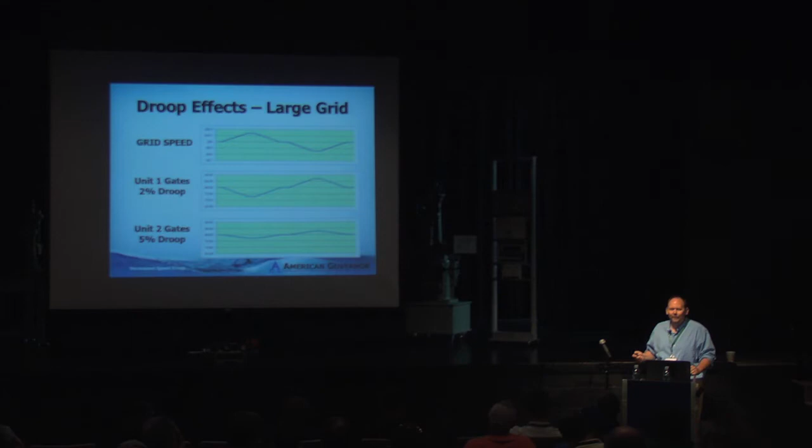Now, the need for droop serves a number of purposes. It's actually a form of compensation, so it adds stability to the turbine control system. Changes in gate position are used as feedback to provide stability. As the gates move, we adjust our speed reference, and it helps have a calming effect on the governor, allowing it to stop at the desired gate position. It also helps compensate for water starting time and machine starting time, as will be discussed later in the stability discussion. It also allows multiple units to share load together.

If we didn't have that automatic feedback mechanism, for all the units you have online, if you changed your speed reference, it would want the turbine speed to increase to that number. So if you were sitting at 100% speed and gave it a speed raise, the gates would start opening, because you're waiting for the speed to actually change. But on a large grid, you only get small changes, not large ones, and you'll never satisfy your governor, so you'd go wide open. Conversely, if you backed off the speed adjust, you'd drift all the way closed until the unit was unloaded. So it's a feedback mechanism that says it's okay to stop at a gate position when you're not at 100% speed.

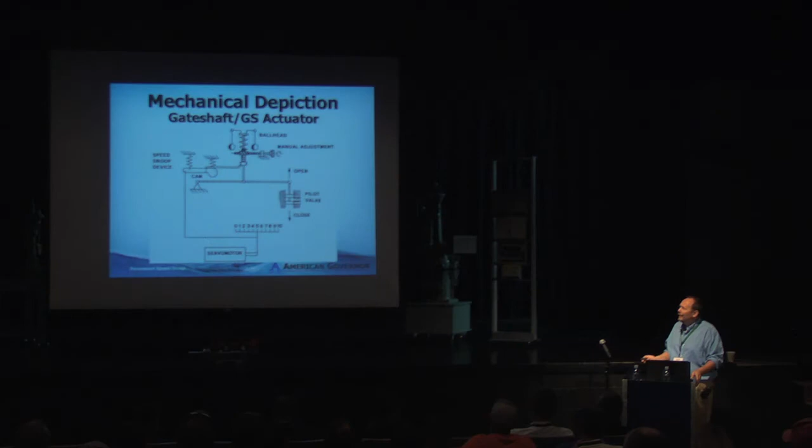So this whole assembly slides up and down, and this is your speeder spring. As the gates move, you get this assembly rotating, which causes this lever to pivot up and down, which then slides the speed adjust up and down. It's a very simple mechanical feedback, and that accomplishes the droop function.

So you've got your adjustment here, your droop adjustment here, and your speed adjustment up here. The speed adjustment, you adjust by turning the knob. It turns the worm gear drive, which drives this cup up and down relative to the sleeve. So you can create more tension by cranking the cup up. You're compressing the spring, and then this assembly has to slide back down to relieve that tension. Is that pretty clear to everyone, how that works? Okay.

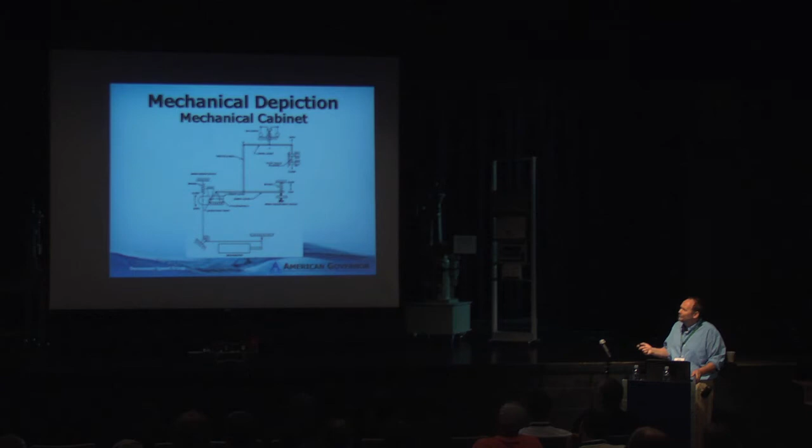Right, now here's the more complex version of that. This is kind of the whole ball of wax all put together. Hopefully by day 3, for a lot of you, this diagram will be old hat and it won't be intimidating at all.

There's a lot of stuff going on here, but this is the actual full schematic for the mechanical cabinet actuator. But really when you break it down into its sections, everything's just the same as what I showed you.

We got the ball head coming in, our pilot valves over here, here's our floating levers, and here's our speed adjustment. It's just a slightly different configuration.

As you change your speed adjust, you're just moving the end of a lever up and down, and in order to get everything back to the centered position, your droop has to come in and lower or raise the other end of the lever. It's very straightforward, and it's connected to the gate position.

So once again, you have an adjustment of where the fulcrum ball comes in, and based on how you turn the droop dial, that just changes the pivot point.

So even though the diagram itself looks a little complicated and overwhelming, when you start looking at the individual pieces, like the gate limits and the dash pot for temporary droop and the ball head assembly, it's all very straightforward.

And I think Jerry's kind of impressing that upon you, that the governors are actually pretty simple when you have your basic feedback mechanisms in place.

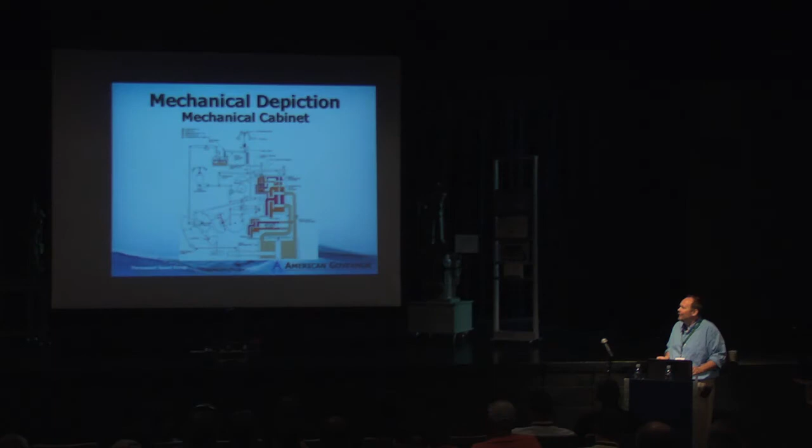Now, we talked about the mechanical governors, and I just want to say that in digital governors, basically we do the same thing, it's just we do it through calculations.

We go ahead and set up an equation where we solve and balance the equation and wind up with a resulting error.

The basic equation is the speed, which would be your system speed or your turbine speed, has to be equal to the speed reference minus actuator.

We say actuator instead of gates because sometimes it's needle, sometimes it's deflector, times the droop value. So basically, it's a very dynamic equation, and solving for error, we wind up with speed reference minus actuator times droop minus the speed.

So feeding our PID, which is a method of controlling the gates with a stability routine, basically you generate your error. You can either change the speed reference, you can change your droop, you can change the actuator position, or you can change the actual speed.

So imagine when you're offline, this equation's being continually solved. You got your speed, which actually is changing because you're trying to synchronize.

You got your speed reference, which is changing because you have operator input trying to get the turbine to speed up and slow down from either the operator or the automatic synchronizer, and you have the actuator, which is the gates, actually moving the whole time.

All right, so when you're going to synchronize, this equation is very dynamic, and it actually bounces around quite a bit. If we look at the PID that this feeds, you can actually see the error moving up and down.

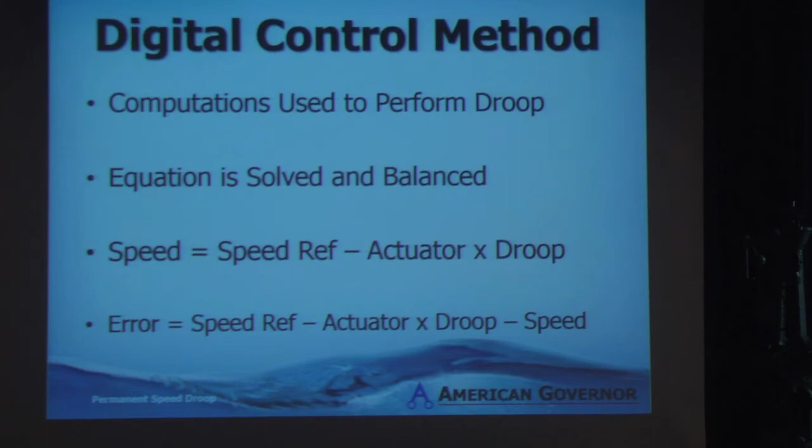All we're trying to do is just balance these three components out all the time. It's just sitting there balancing it out. And mechanical governors do it mechanically, and digital governors literally have this equation built into it. We solve for it and then send it to the stability routine.

So here's a real world example of what's going to happen. We have a generator that's capable of operating one saw. So what's going to happen when the first log is sent through there?

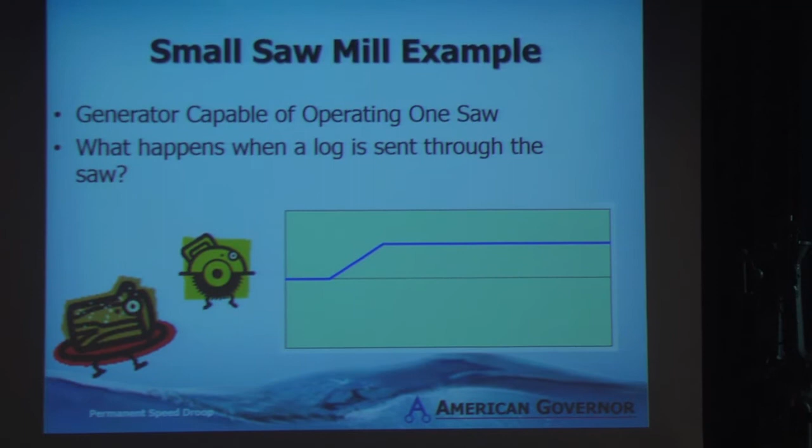What we have here is the load is increasing on that diagram. So basically, we all know from common sense that you go ahead and load up the motor. The actual load of the unit is going to increase.

The speed's going to take a dip. And then with temporary droop, we're going to wind up coming back. The gates are going to swing around in response to the load, but then we're going to settle out.

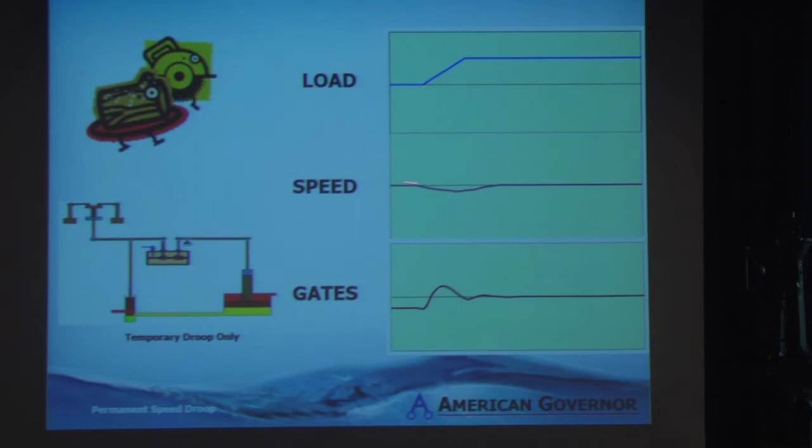Notice the gates are at a new position because we have to put more power in while we're cutting the wood. So initially we have a speed disturbance. The governor reacts. Now this is temporary droop only, we do not have permanent droop in here. All we have is a dash pot for stability. So we wind up with the gates in a new position to get our speed back to our nominal speed.

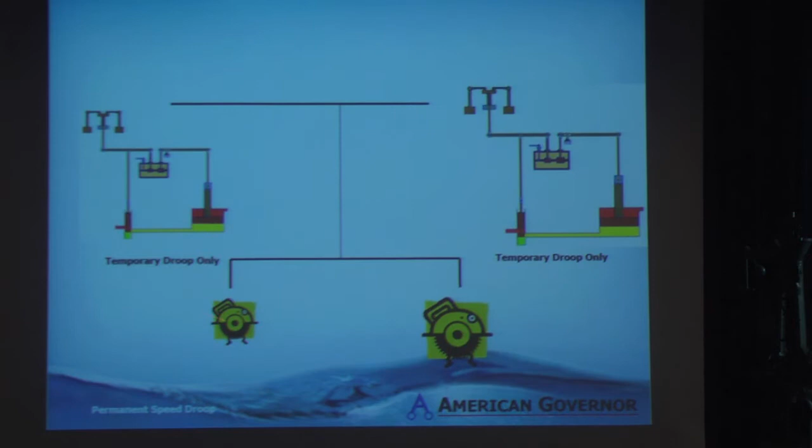But now the demand for wood is increasing, and we have to add more saws to our system. That presents a bit of a problem because we want them all to work together. If we have two units with temporary droop only, they can start fighting each other. So we've got two saws working off the same grid, one depicted larger than the other.

So we go ahead and start feeding wood in, and as we create a system disturbance with zero droop, we can create an instability, because both units at zero droop want to do everything they can to get that speed back to the original set point. They've been told: go to 100% speed, keep it at 100% speed, no exceptions. So they're going to do everything they can with their actuators, their gates, to get that speed back, but they don't know the other guy's there. So they start reacting to each other, reacting to changes, and you can wind up with a scenario where the whole system goes unstable, because the units react as quickly as possible to the load, with some temporary droop for stability, but it can lead to instability, as shown.

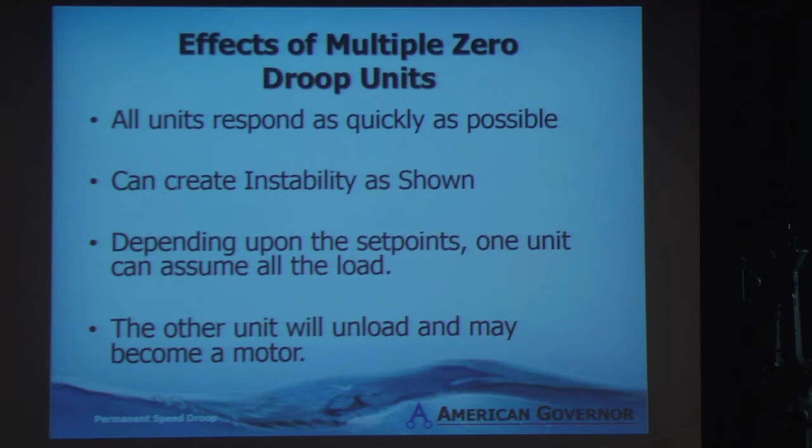Or, depending on the set points, because no measurement system's perfect, one might see the frequency as a little higher than the other, so he'll be trying to shed his load, and the other one sees it as too low, so he'll be trying to pick up. So you can actually have them going to extremes, where one unit loads all the way up and the other sheds all his load, but then once he sheds far enough, he can't carry the whole load anymore, so you wind up with this weird interaction where one guy goes all the way open, and then the other comes back up to some level. But you don't have any control of the system there. You're lucky if it goes to a stable state.

I've showed up at sites where the droop cam was mysteriously set to zero, and the unit would be fine when offline. As soon as they closed that breaker, the unit would go all the way to 100%. Then the operator would try to get it back down, crank the speed adjust down, and the unit would unload, go in the hole, and trip off. So all it was, was just a droop cam setting, because without that feedback mechanism, you can't get rid of the error in the speed reference without the actual speed changing. And if you're online, your speed's not going to change enough to pull that back out.

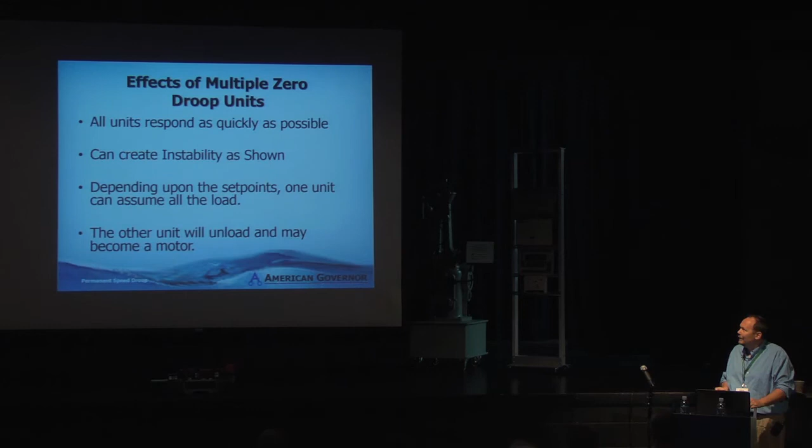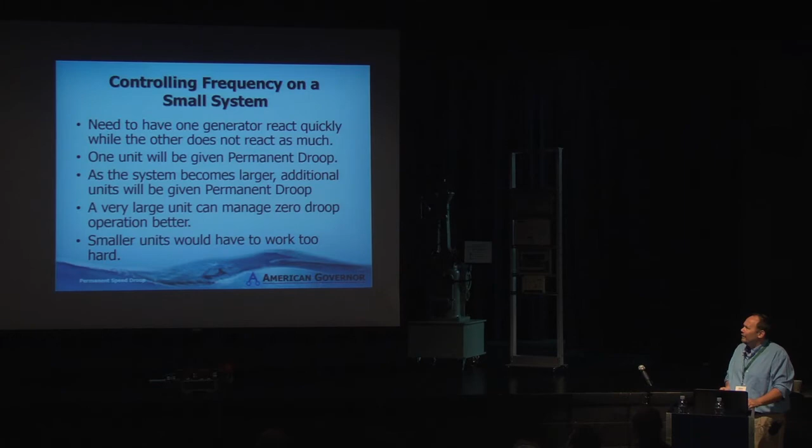So you don't want to run multiple units together without droop. What we want is, you can have one unit on zero droop, but the other needs to have some sort of droop on it. So we're going to put permanent speed droop on the system, and as the system becomes larger, each unit we add will also have speed droop with it. You can have one unit, preferably a larger unit, manage the zero droop, and have the smaller units have, say, a 5% speed droop on them.

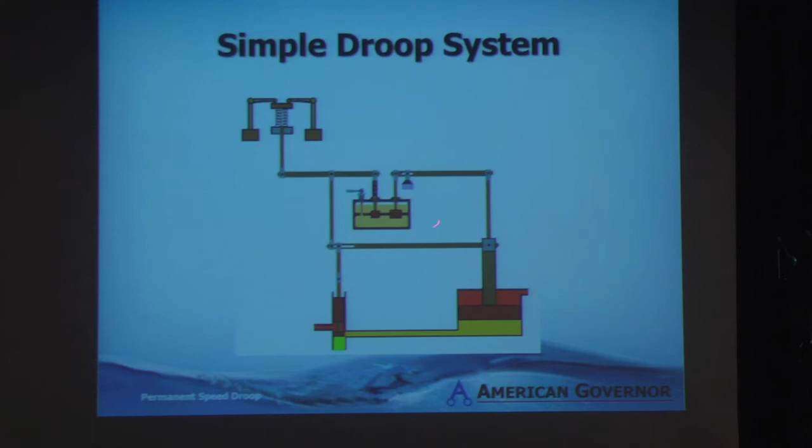So this is a very simple droop system where all we've done is added basically - there's no real adjustment here, I'm not even sure that adjustment would affect other things, so that's not really a droop adjustment, but it's just some sort of fixed feedback coming in. So as our actuator moves, we can see how we're acting on the pilot valve to cancel out what this side is doing. And of course we have our dash pot, talked about before, as our temporary compensation for more stability. So now we have a simple droop system.

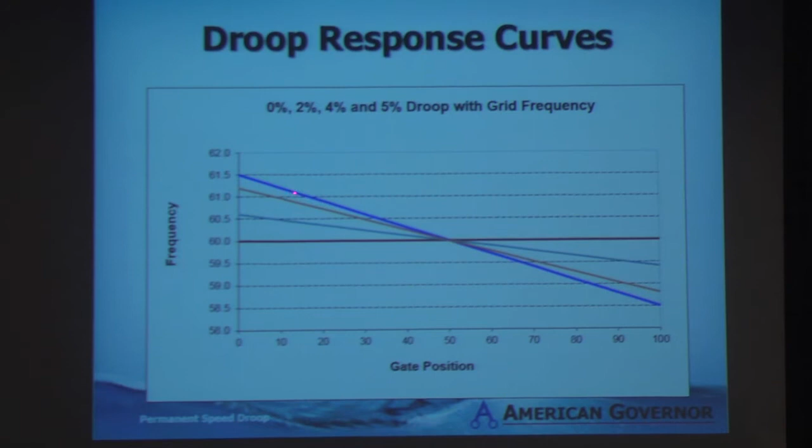What we're going to see is these response curves. I hope this makes sense. The different colors represent the droop value - the steeper the curve, the higher the droop value. So the unit will follow this curve, or these lines, according to their droop set points. This is a 5%, a 4%, a 2%, and the horizontal line is the 0% curve. Now let me interpret this just for a minute.

If you're sitting at exactly 60 hertz and 50% gate, and you're running 5% droop, if the frequency changes on you from the outside world, you're going to follow this line to wherever that frequency intersects the blue line, and that becomes your new gate position.

It's very easy to predict this because it's linear feedback, so you know exactly where you're going to go. If the frequency increases to 61, your gates, because it sees the grid going too fast, will back off until you wind up at approximately 20%. So it's a fixed response you're going to see. You've basically defined an allowable speed error that's acceptable to the governor so it doesn't freak out and go all the way to its extremes. You've created a stable definition for how to behave under certain situations.

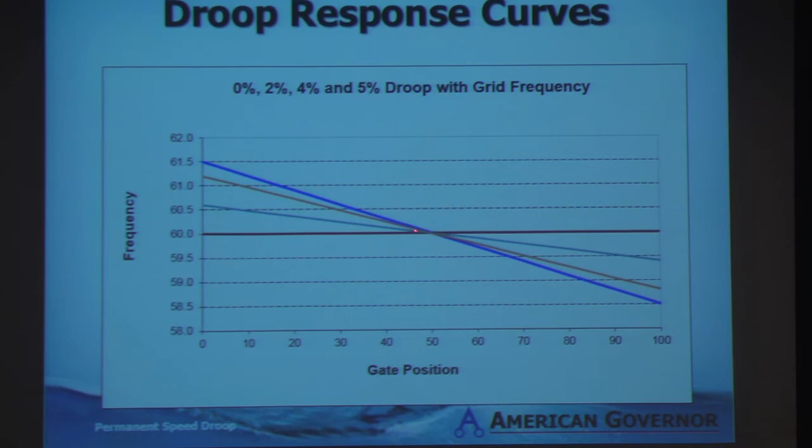If you set it and walk away and the grid frequency changes, you can come back and say, oh darn it, I'm not at 50% anymore, I'm only at 49. But you don't know if something's going on with the governor, if somebody made a change, or most likely it's a change in frequency. So to evaluate what the governor's doing, you have to know what the frequency is to evaluate its performance.

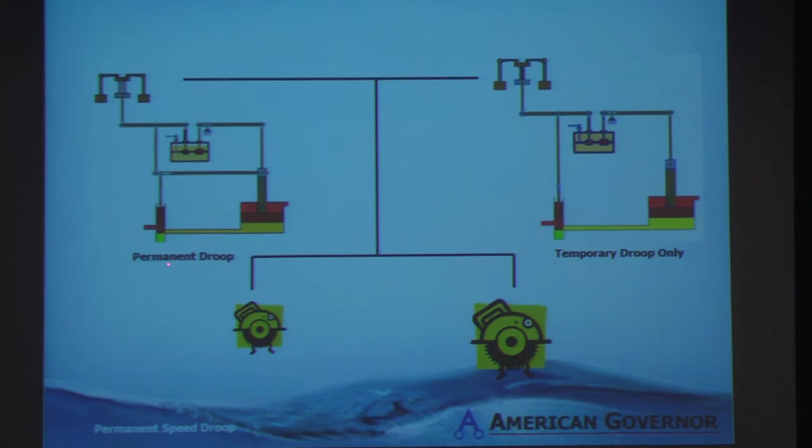So here we are back at the sawmill. Now we've got two units running. We've got temporary droop only, so that's going to be zero droop, and then we've got permanent speed droop on this saw. So we have our speed droop governor here and our temporary droop on the right, both connected to the same grid. As the load goes up, since we're cutting wood and take on a load, our speed drops down.

The first unit at 0% droop, his job is to do everything he can to get that speed back up to 100%. So you're going to see a reaction like this, where he takes on the load. This is the gate swinging around, this is the gate position. You're going to see it swing and show a quarter wave decay for a properly tuned governor. But he settles in at a higher gate set point when the speed finally settles in, so he's satisfied.

The zero droop governor is only satisfied when the speed has returned to its initial 100%, right? Whereas unit number 2, running 5% droop, initially picks up the load because we have a speed error. Remember, the 5% governor is following that curve, following that blue line. So the blue line told this guy to go to this gate position with this error, but as the error goes away, he's following that line back to right where he was.

So unit number 1 at 0% has actually picked up the majority of the load, or all the load change, I should say, and the 5% guy is happy as a clam because the speed's going back to 100%. So because of his droop equation, he's satisfied here, whereas the 0% guy is at a new position. Even though the speed's right back where it was, he stabilized at a new position. So the 0% unit wants to do everything it can to get back to 100% speed, while the 5% droop unit doesn't care so much about speed except for the fact that he's following that blue line.

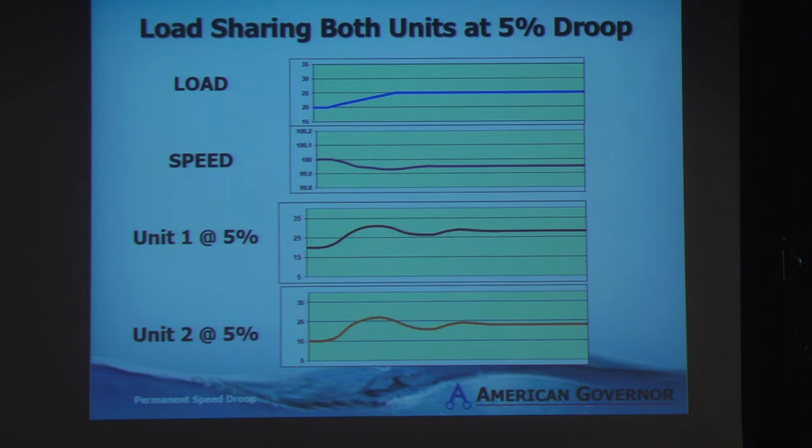Now the operator could, if he thinks his load's going to be constant, walk up to each governor, crank up the speed adjust, and crank it up until the gates go open enough to get you back to 100% speed. So without some operator involvement to act as kind of an integrator, you're never going to get back to your 100% value, right? Because they're both running 5% droop.

So in order to load the unit, we're going to have to make it think it's going too fast or too slow. We've kind of covered this in the background already. So what we do is we bias the speed reference. When you're online, you move the speed reference up or down, and it'll create that error, and it'll move the actuator until the droop function pulls it back out.

Is that pretty clear how that works? So your speed's not going to change, and your actuator's not going to change on its own. The only choice you have as an operator to load or unload that unit is to change that speed reference value, and then it'll follow the predefined droop curve and pull out the error that you induced. The droop will pull that error back out until everything's satisfied.

So once again, on this chart, we can see that we have our speed adjustment. We change it, and if the speed doesn't change, then our pilot valve will move because of our speed reference change. And then through the hydraulics, we move the gates, and only the droop can get you back.

Now, if you're just sitting still and you wind up with a speed change, you're going to get the same effect without changing the speed reference. So if you actually get a change of frequency on the grid, you're going to wind up moving the gates, and then the droop is going to come in and offset this pivot point, which will then, instead of recentering this lever, you're going to be recentering this lever.

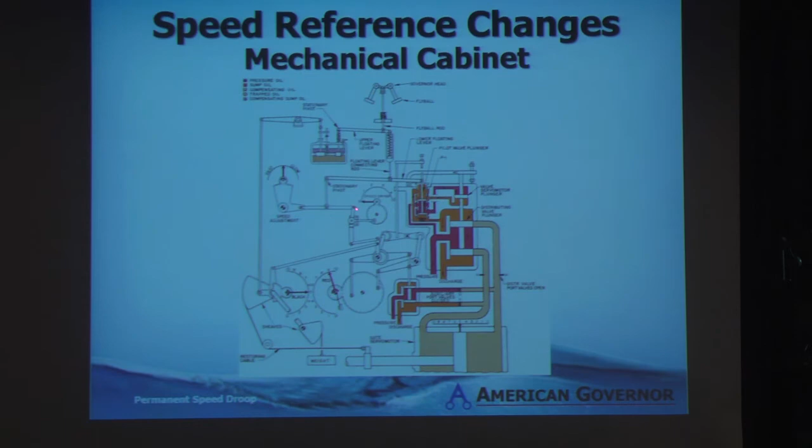Because you've changed, this ball head is not in the same position. So no matter what changes, whether it's your speed adjustment or your actual speed, the droop's going to come back in and nullify that error and make the gate stop moving.

So basically, droop is not a mystery. When you set your 5%, your 4%, you can calculate exactly what your expected gate change is going to be based on an actual change in speed or a change in speed reference.

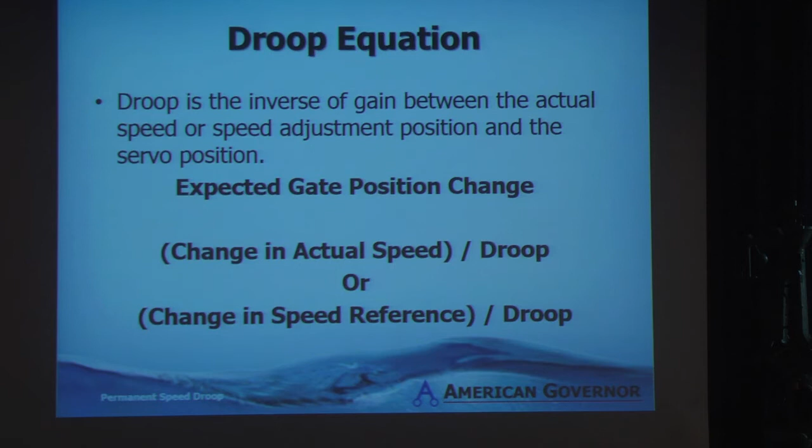So you know if you're running 5% droop and you do a 1% speed reference change, you're going to move your gates 20%. It's just straightforward linear mathematics. So given that, if we were to see a 1% change in the actual speed or speed reference at 5% droop, we get 1 divided by 5 is 20% servo change.

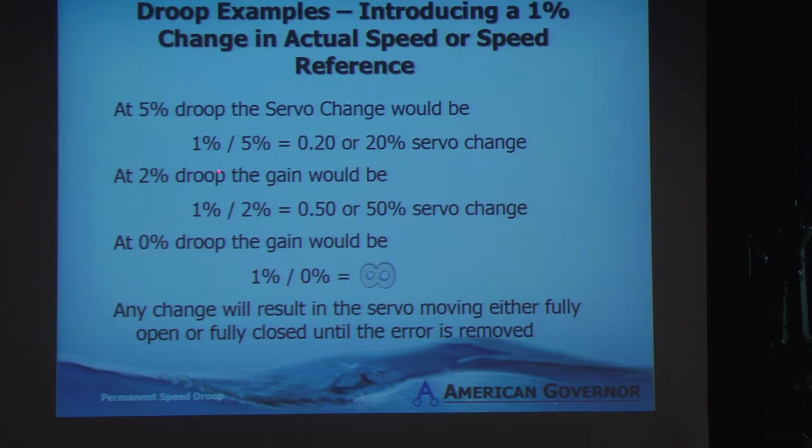At 2%, you just do the math, you get a 1% speed reference or speed change divided by 2, now you're at 50%. So there's a huge difference in operation between a 5% and a 2% unit. You're going to find the 2% unit cares much, much more about speed than the 5% unit. And of course, at 0%, you do the math, infinity.

It's going to do everything it can, everything within its power to get that speed error gone by moving the actuator, because there is no feedback. So what will happen is you either go fully open or fully closed if you can't actually change the speed, because say you're online.

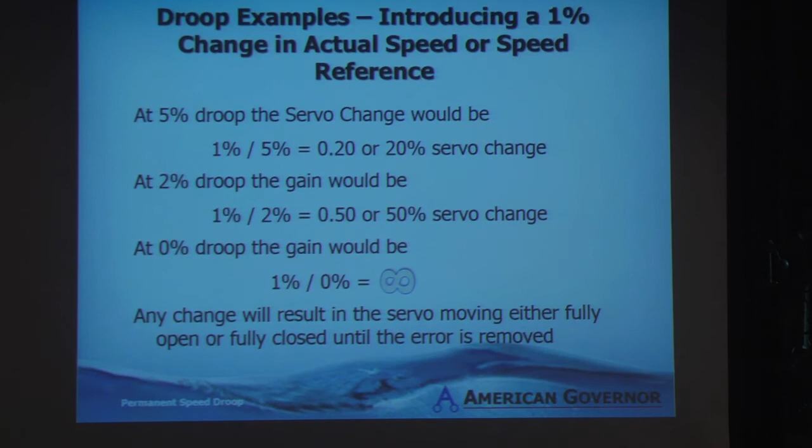So here's some normal daily grid variation example. As I said early on, in our neck of the woods, we can go 98 to 02 pretty easily. So we get a tiny little speed change on the grid. At 5% droop, you actually wind up with, just running through the math, a little over 0.5% gate, and that's over just a couple of minutes. You can watch the grid go up and down.

So you can sit there, and if you're oscillating, say between 98 and 02, you can see a 1.2% swing in your gates. I shouldn't really call it a swing, I should call it more of a drifting, because it does take time. But you will see motion. And of course, if you're running at 2%, it's even worse. So you can easily see fairly noticeable changes in your gate position just based on normal grid behavior.

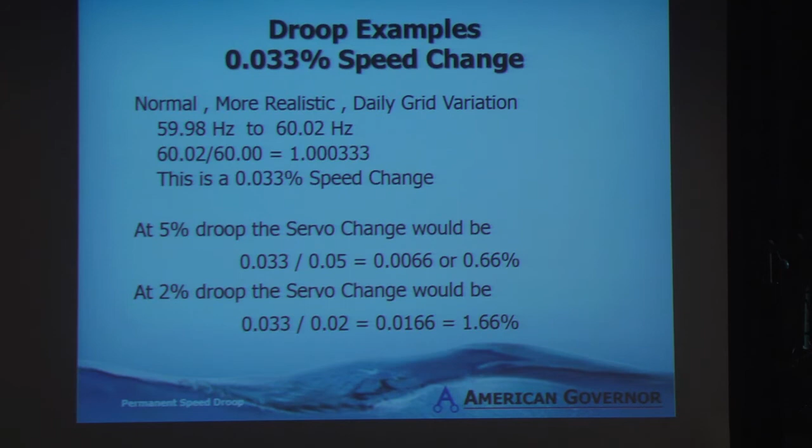This is a very common number to watch the grid change. So it's okay to have the unit swinging around. The governor's doing its job. It can't maintain the grid speed, but it can help out. So as your grid starts to slow down, all the governors all over the area try and take on a little bit of load. And if everybody is running droop and picks up a little bit of load, then the frequency stops dropping. Conversely, if things go too fast, and everybody sheds a little bit of load, then you'll head back towards your 60 hertz set point.

So that's just normal operation for a governor. That's why hydro is fairly important for stability, because a lot of people don't run that way. You'll have various nuclear plants that want to go on reactor control, or steam plants want to run off their boiler control. They don't want to be bothered with actually changing with speed and turbine. So there's all kinds of studies that talk about the importance of hydro and running droop.

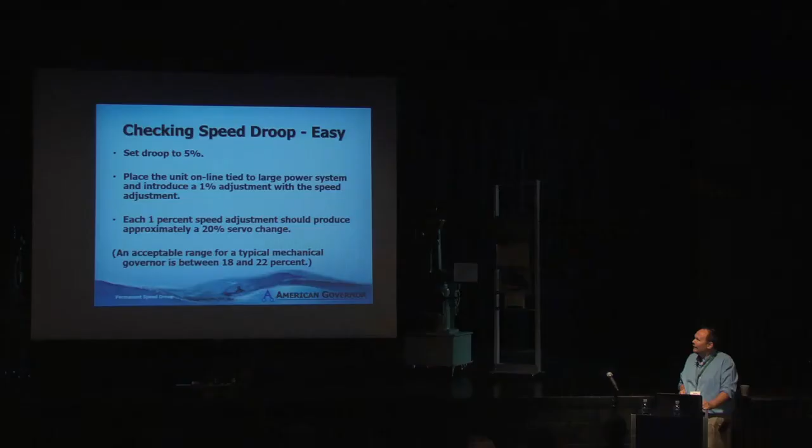So if you actually want to check your speed droop, it's pretty easy. We'll say you set your droop to 5%, put the unit online, and put a 1% speed adjustment in. So you should expect, as we had discussed previously, the ratio will give us a 20% servo change. 18 to 22 is pretty good for a mechanical governor, although I'm sure they can do better. Is that a good number, Jerry? 18 to 22, pretty good?

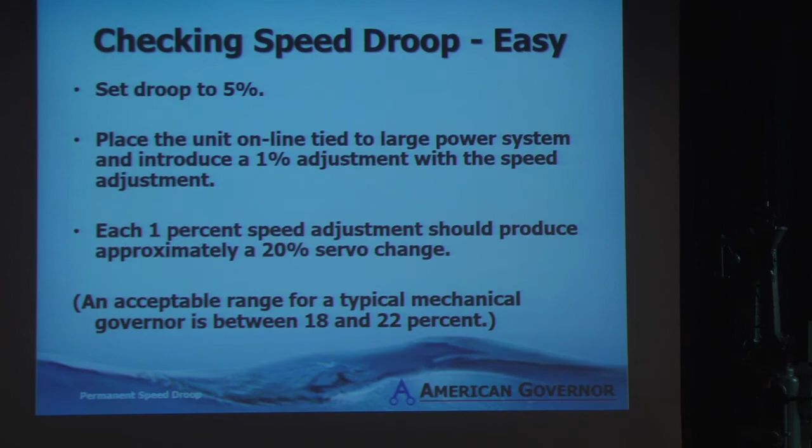So the more complex way is actually to put the system on and load it up, record the gate opening and the ball head speed, unload the unit with the gate limit, basically leave the speed adjustment alone. Then once you open your breaker and you're free to speed up the unit, raise the gate limit out of the way and record the ball head speed, and your droop calculation follows this equation.

So what you do is you go online, you go to a fairly high speed reference. The higher, the better—less linear interpolation error. Go ahead and unload the unit with the gate limit. Open the breaker, and then you can take the gate limit out of the way. You're not going to go into some wild overspeed because the gates aren't going to get nearly to where they were, since obviously the speed of the unit will change, and that'll rebalance your equation.

You're not counting on actuator position to balance you out. You actually will have a significant change in speed, so you shouldn't be too afraid of doing the test. And that'll give you, hopefully, the same number that you see when you're online.

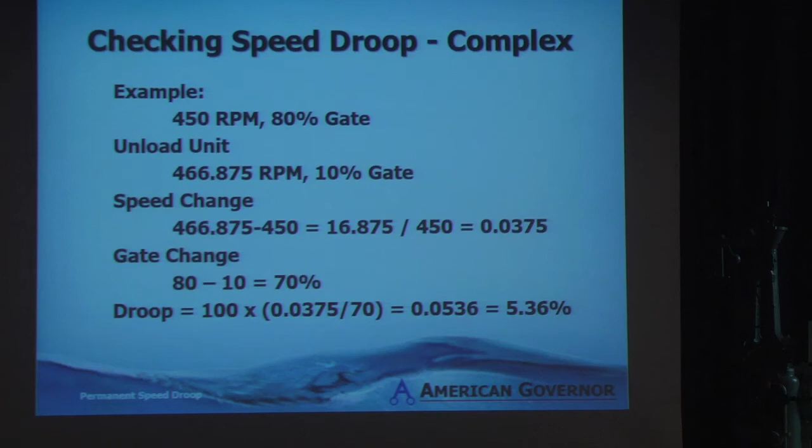So here's just a quick example: 450 RPM, 80% gate. You unload the unit, and then move your gate limit out of the way. You wind up with 466 RPMs at a 10% gate. So you just do your math, run through the math, and then there's your droop calculation. So all this stuff should be in the handout, so if you guys ever need to check that, you can just refer to this page.

People want to verify that their units are responding properly. So when we commission governors, like new digital governors, we actually do timing tests where we'll put in a step test and make sure that the governor can do a speedy response.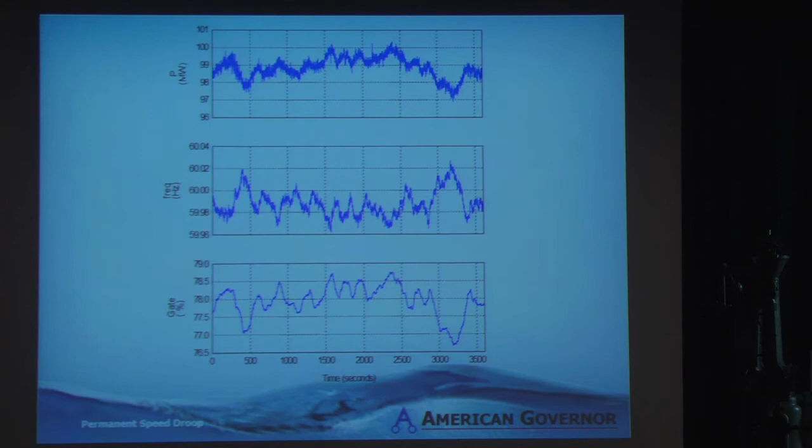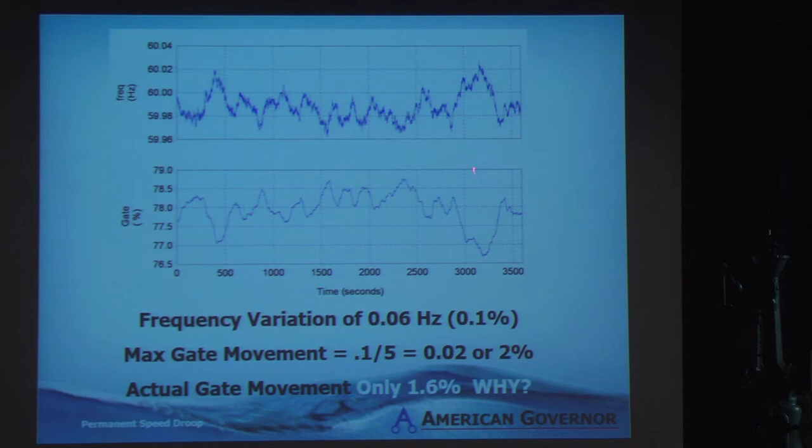So frequency variation of 0.06 hertz. Say you think your max gate movement would be 2% calculated, but you wind up with only 1.6%. The question's kind of like, well, why? Why didn't we get where we wanted to be? And because you all have the slides, you all know the answers already. Is that what we talked about before?

First of all, there's a speed deadband allowed inside the governors. We have a plus or minus 0.01% for a 0.02 deadband that you can pick up on. So although the newer governors are much more accurate, the old mechanical governors I think were like 0.004. Is that a good number? You'd be shocked how well a mechanical governor actually measures the speed of the unit.

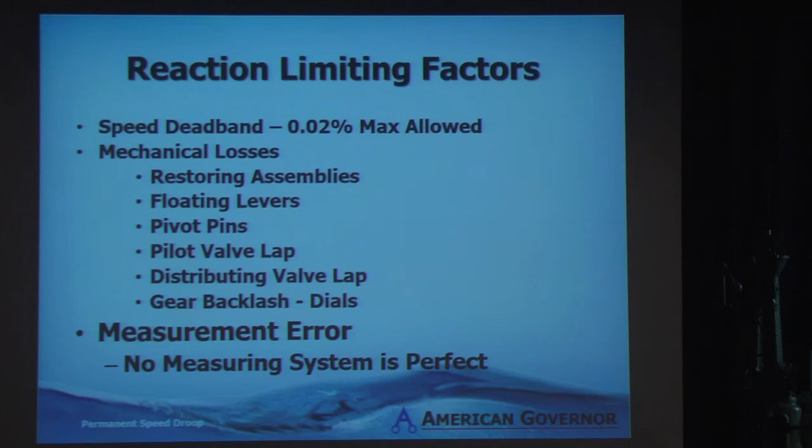So first of all, you do have a small deadband that you got to deal with, so you're not going to see every speed change. And then, like I said before, you got mechanical losses in the restoring assemblies, floating levers, some pilot valve lap going on, some little backlash in the dials, and just no measurement system is perfect. It's really hard to measure a tiny speed change. The equipment has to be capable of measuring tiny speed changes also.

So that's it, that's the end of the presentation. All right, very good, I'll turn it back over to Jerry.

I'm just going to kind of reiterate a little bit about the stability thing. But in the Droop class, we have a magic number, and it's 16.67. And if you divide the Droop you have, like 5, into 16.67, that would tell you how much your gates are going to move per tenth of a cycle.

And most of the system people don't work in percent speed, they work in megawatts per tenth of a cycle. So that's a number that'll work, 16.67. If you got 5% droop, that number stays the same. Okay?

One of the other questions that I think you brought up, when there is a grid disturbance, there's no one unit that's large enough to be zero droop, okay?

So what happens, there's system computers, they call them load frequency controllers, and they sit there, and as Dan pointed out, the governor can't do anything until there's an actual speed change, okay? Well, the first thing that happens when there's a grid disturbance, the WR squared, or the mechanical inertia of the unit, it absorbs it.

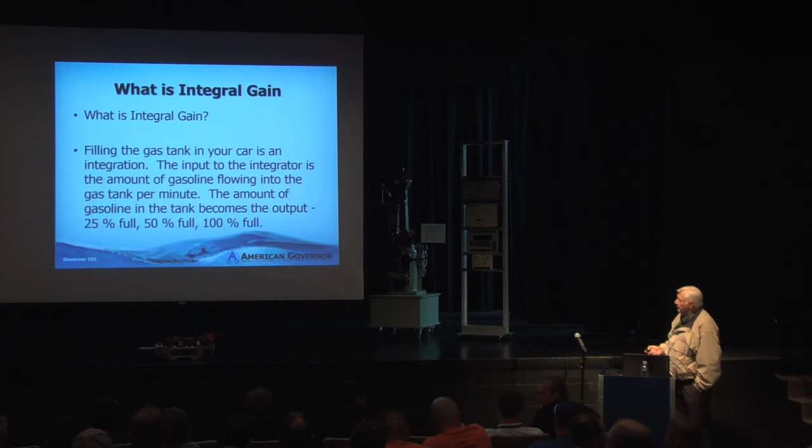So it's like filling the tank. And then what is derivative gain?

Well, how many people in here have stood before the actuator when they've started it? And the gates come up, and now we've got the gates open against the gate limit or the speed no load solenoid. And there's a tachometer on the unit. Has anybody ever watched that? You ever watched a unit start? Well, if you're looking at it and there's an operator with you, the speed will be about 90, 92%, and all of a sudden the gates start closing. You're not at 100% speed yet, but the gates have already started closing. That's because the ball head measures the rate of change of speed, and the fly balls have accelerated out far enough to know that I'm going to go into overspeed unless I get the gates closed. So there's the derivative part of the governor. It's the output from fly balls is proportional to the rate of change of speed of the turbine.

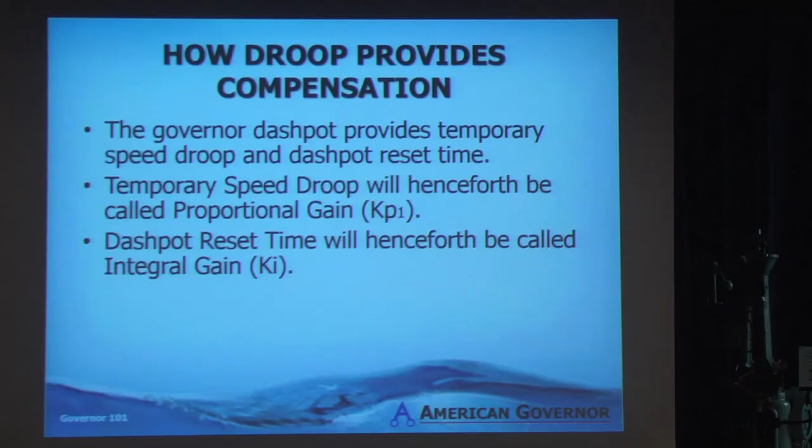So how do we provide compensation? It comes from the dashpot. We had the two components that the governor does. What does it do? The temporary speed droop is called proportional gain. And the dashpot reset time is integral gain. And the derivative term is KD.

Now, I'm going to approach this part of the class a little bit different than Dan was talking about - system speed versus gate position, right? So what I'm going to do on my graph, I have speed adjustment versus gate position. And this is a 5% speed droop machine, okay?

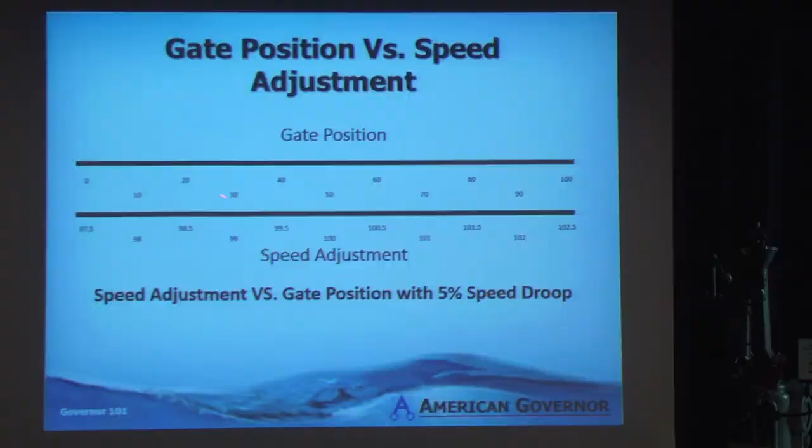And so once you synchronize the machine, and I can't change the system frequency anymore, if I crank the speed adjustment up, it's going to be like Dan said - if I had 5% speed droop, and I crank the speed adjustment 1%, the gates will move 20%, right? So let's assume that at 98% speed adjustment, my gates are at 10%, and I synchronize at this point. If I go from 98% to 99%, that's a gain of a change of 1% speed adjustment, right? The gates went from 10 to 30, the same as what Dan said. So the frequency will do the same thing the speed adjustment does.

Now, one of the reasons we do this is to let you know that you have to have endpoints on the speed adjustment. 102.5 minus 97.5 is a change of 5%. Everybody agree with that? That's 5% change? Okay. And that's 5% speed droop. It takes 5% change in the speed adjustment if the unit has 5% speed droop for the gates to go 20%. That's why we get that number of 20 to 1 gain. So this is gate position versus speed adjustment.

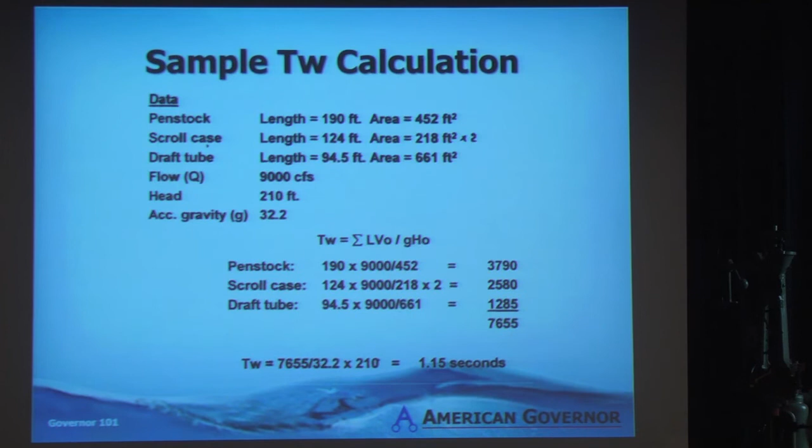If we take these numbers we have for the penstock, scroll case, draft tube, flow, head, and acceleration of gravity, and plug them in, we come up with a water starting time of 1.15 seconds. Now, some people might ask why we divide by 2 here for the scroll case. Well, if you remember what the scroll case looks like, it's big at one end and gets smaller at the other. It's very hard to integrate that water supply over that entire funny shaped spiral case, so they just average it.

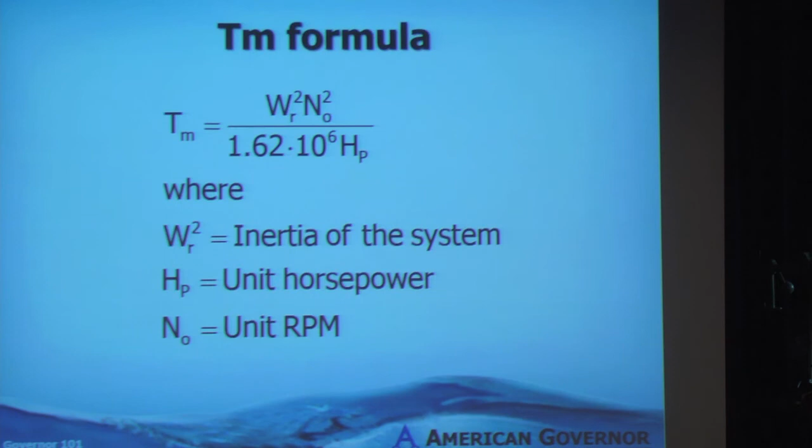But remember, we've got 1.15 seconds for water starting time. The TM formula is WR squared NO squared over horsepower times a constant. If we plug the numbers in from the sample calculation, I got 5.9 seconds.

And what was my water starting time? 1.1 something, right? Well, what's 1.1 plus 5.9? About 7. I immediately know how far open on a mechanical Woodward governor my dash pot should be set. 1/8 of a turn, right? You were close, that's good. 1/8 of a turn. That's why I say that if you know the mechanical starting time and the water starting time, you add them together and you get your dash pot reset time.

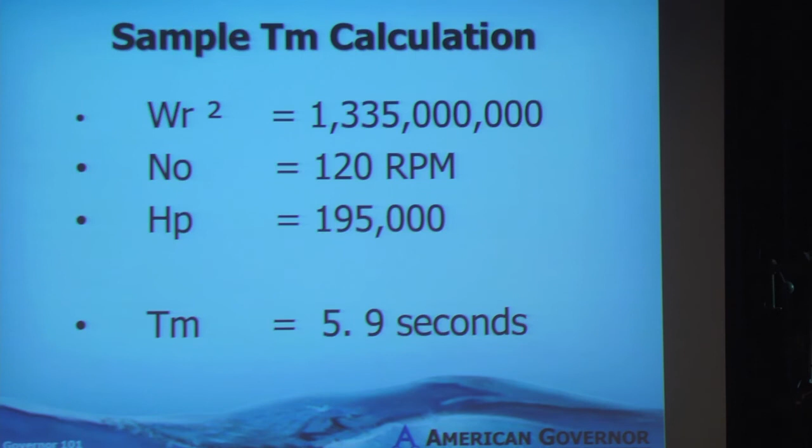So the governor's gate restoring signal, through the speed droop mechanism, provides permanent speed droop. Permanent speed droop is permanent proportional gain, and as Dan said, it adds to the stability of the unit. If you take your unit, put zero droop on it, and go to synchronize it, it might be a little bit fuzzy. Crank the speed droop back up to 5%, and sometimes it'll get better.

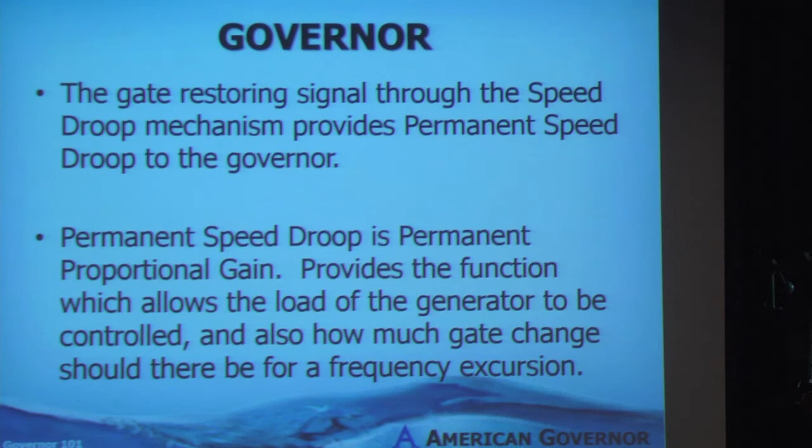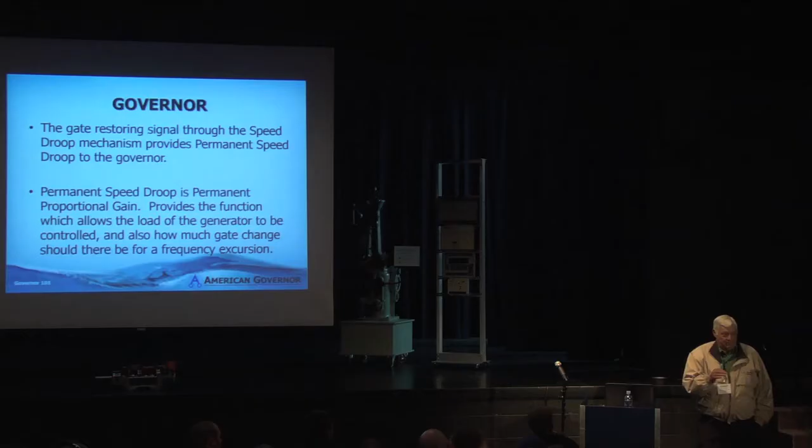I just remembered one thing I wanted to say. I've gone out on units, overhauled them, and made them super sensitive. Then we synchronize the machine, it picks up load, and the operator says, this governor ain't working good now, it's drifting, the gates are moving. Yeah, but if you look at the frequency, you can see that it's following it. They don't realize that those minute changes Dan was talking about are exactly what the governor's going to move for. So you have to be careful. If the operator says the unit's drifting all over while you're working on it, make sure you know what the frequency's doing, because the governor might actually be behaving now, where before it was dumb and just sat there, never making any changes.

How does droop provide compensation? When the governor is properly adjusted, the amount the gates are allowed to move for any speed error is determined by the temporary speed droop. I think I told you that. And does anybody remember why we try to recenter the gates after there's been a speed change?

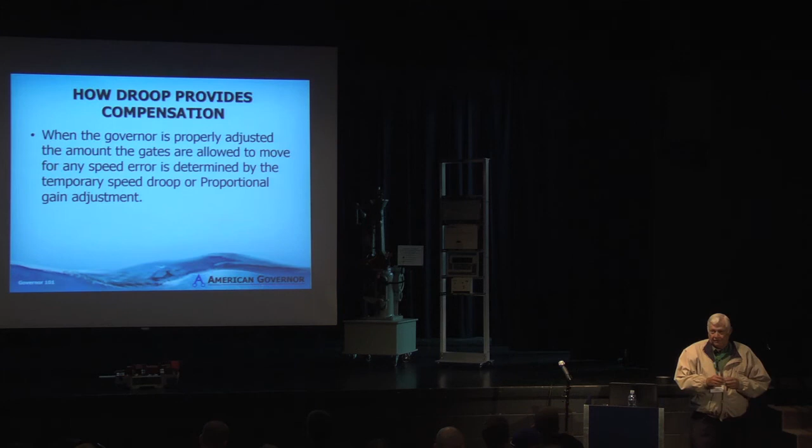We don't want that power reversal to give us too much error signal. So we're anticipating. When you set your temporary droop correctly, this is empirical, you actually have to do it, you have to change the settings. You're looking for the right amount of gate movement so that you get a good, stable governor. If you have too little gain, it takes a long time to recover.

I didn't tell you how long it should be. If you give the governor a 5% error with the gate limit, and then take the gate limit away, that unit should be back on speed between 6 and 20 seconds. So that's the parameter you're looking for: 6 to 20 seconds for a 5% speed upset. Then your governor is acceptable.

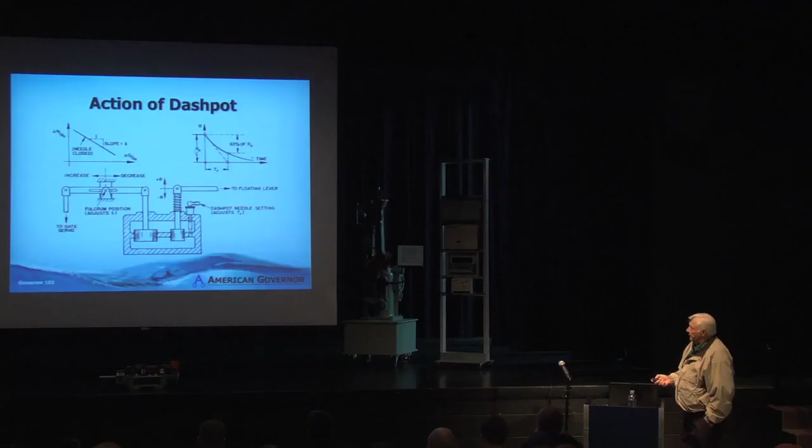So we've talked about the dash pot needle. This here is a curve demonstrating the dash pot reset timer, TR, versus the temporary droop. It's a curve like the one Dan drew, going that way.

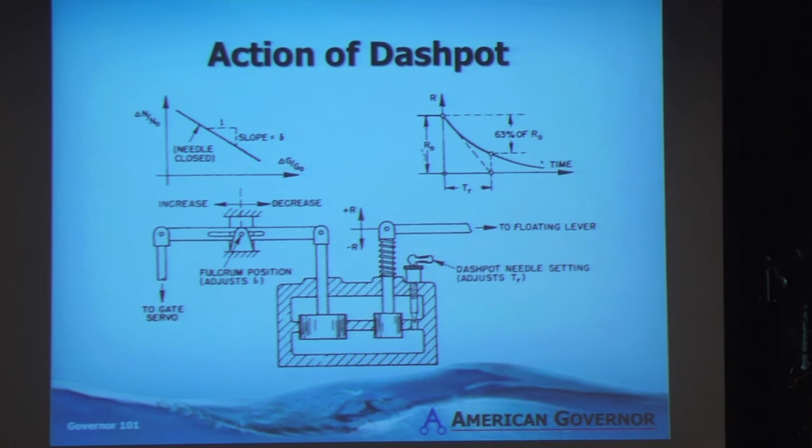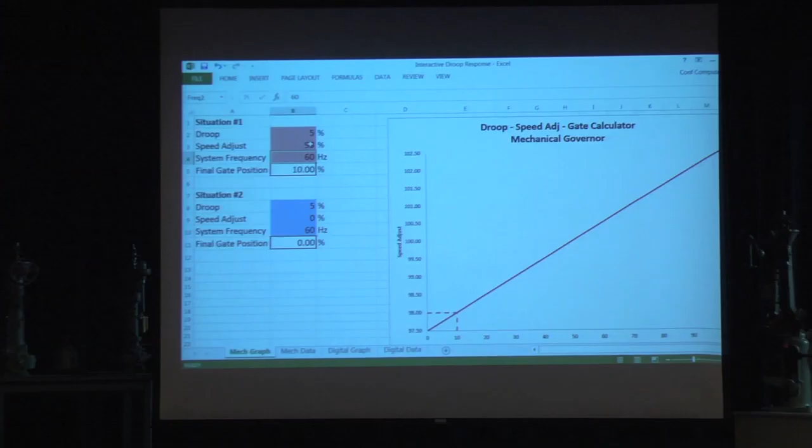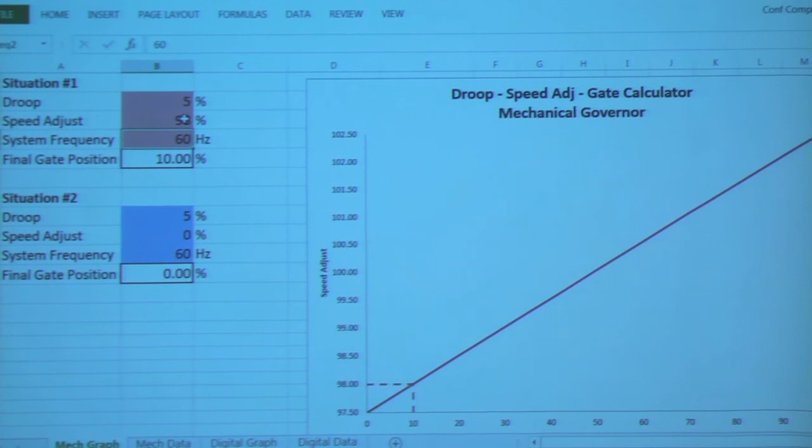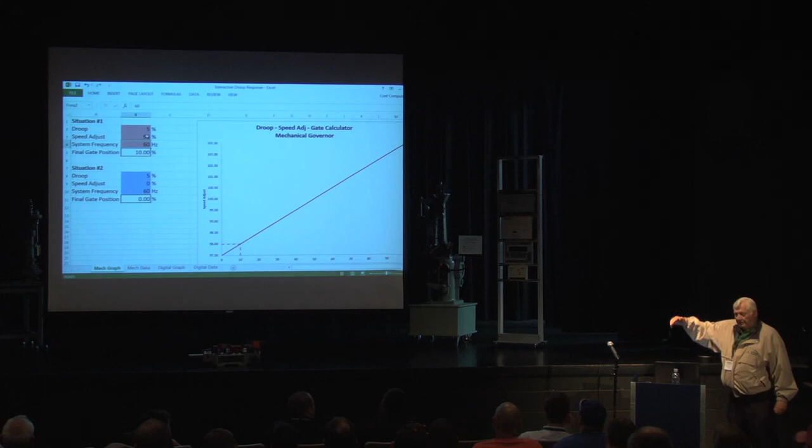So I've now opened up the unit to the speed adjustment I set from 97.5 to 98. I'm at 10% gate as this graph shows. This graph is running from left to right, and on the y-axis it says speed adjustment. On the graph that Dan had, his y-axis was system frequency. So I've taken the frequency and kind of inverted it because I have a simple mind and I don't understand some of that other stuff, so I had to put it in a form I could understand.

I also know that all governors, regardless if you have 1% droop, 2% droop, 3%, 4%, or 5% droop, if I set the speed adjustment at 100%, the gates are going to go to 50%. The reason for that is we're working off of that restoring shaft that moves 60 degrees, 30 degrees either side of center. And if you have a radius, you're going to have nonlinearities if you put all of the movement on one side. So they decided 50% was the ideal spot, giving equal linearity on either side.

So let's take and put the speed adjustment to 100%. Now where should the gates go? To where? 50%, right? Oh wow, they did that.

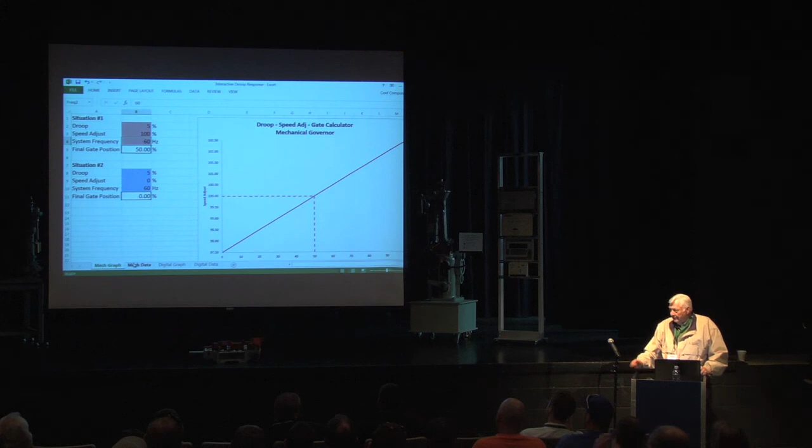Now, if I want to go to 70% gate, what should I do? I need to go another 20%, so 101. Okay.

There I went. But lo and behold, well, we don't want to look at that yet because I didn't use the other chart yet. So now, what happens if the system frequency...

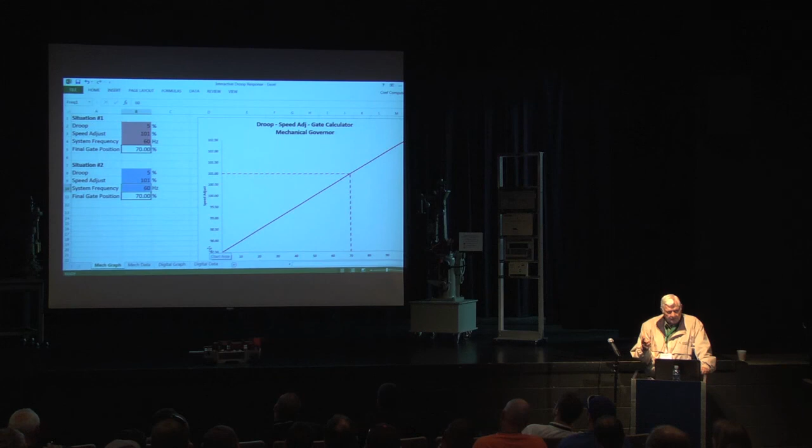Okay, now what happens if the frequency goes up 1%? So what would 1% frequency be? If 10% would be 6... 66. 1% would be 0.6. So 60.6 should be 1%.

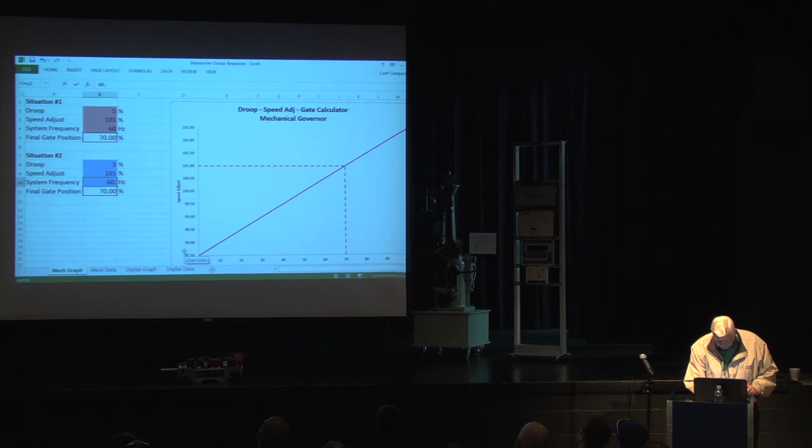Now, where should the gates go if the frequency increases? I put a 1% change in, they're going to change 20%. Are they going to go up or down? Down. So I'm at 70%, so technically the gate should go to...

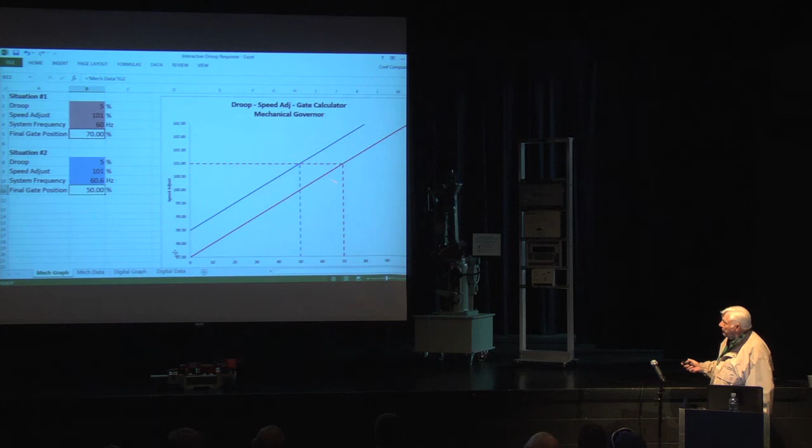See, I now have a new... here's the 60 cycle curve we started off with. If we have 60 cycles, I'm 97.5 to 102.5. But we're no longer at 60 cycle, I'm at 60.6, and now the gate's moved over. So I have gone from 70% to 50%.

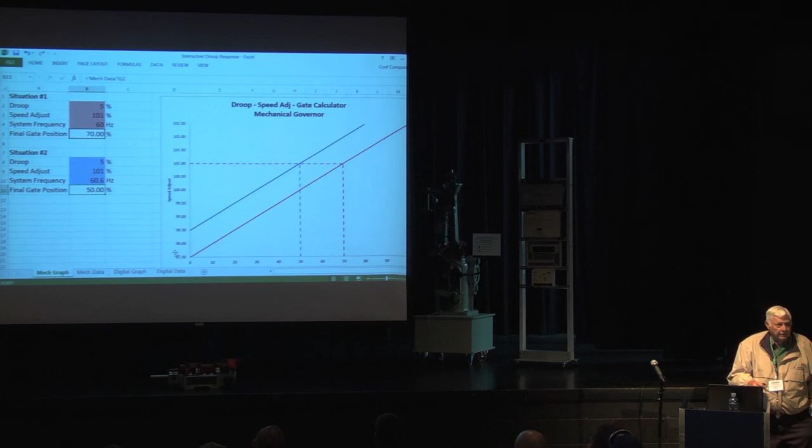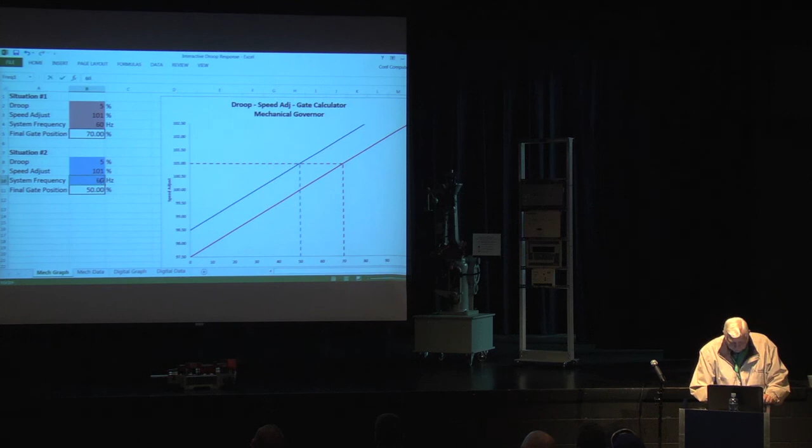So I'm going to put this back to 60. I'm going to take the gates and I'm going to put them at 30%, which is what?

Now I want to load the machine up to 50% gate. Where do I go to? What speed adjustment will make the gates go to 50%? A 100, right? Okay, let's see how the governor -- we know we went 20% -- how did the governor pick up the load?

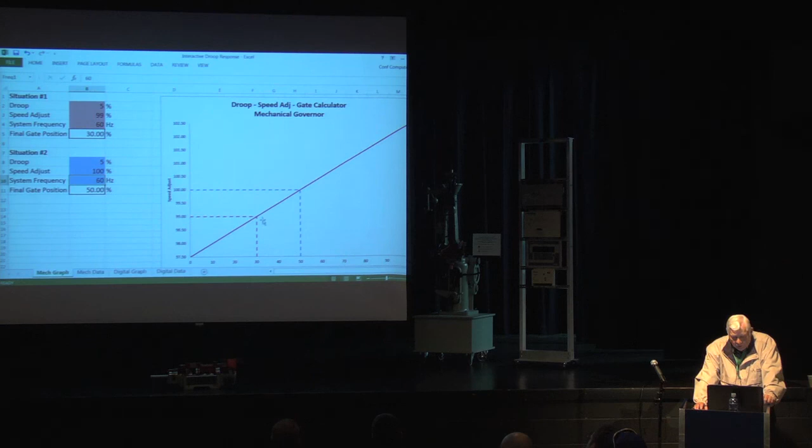How did the governor pick up the load? Okay, there's our response curve, all right. Well, let's see where we're at here. It says my dash pot is open. I close the dash pot, which means I have no dash pot bypass. Look how long it's going to take me to get loaded.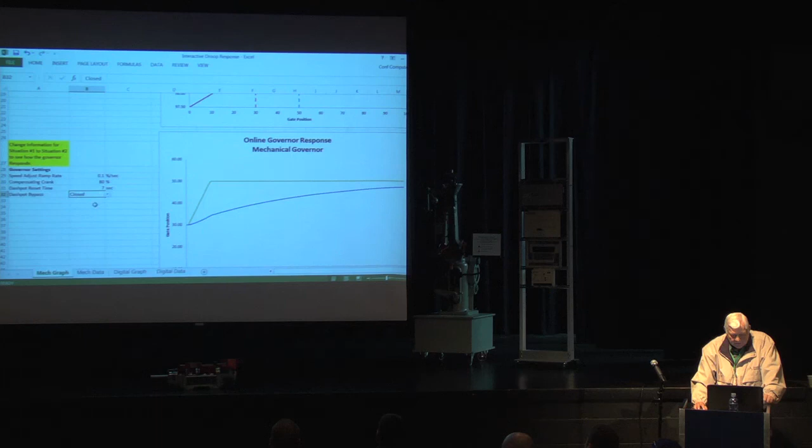So I also have the dash pot reset time at 10 seconds. We can put 7 seconds in there. You notice it helped? Well, how about if I put the temporary droop down to like 80%? That even helped -- I didn't want to be in desktop. And now if I'm going to put it on the dash pot, I'll close the bypass as if we went on the line. Now it's a lot better.

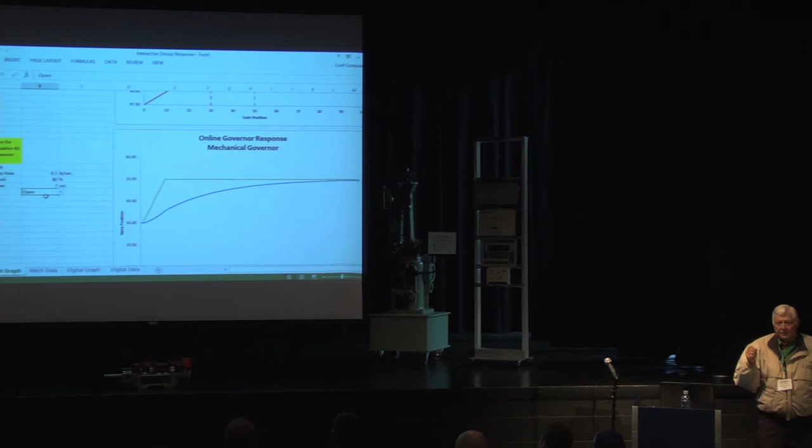So that's what your gains do for you, when we change the dash pot, temporary droop, the dash pot reset time, and we close that dash pot bypass. So that's kind of droop in a different way.

And I have to check the program to find out where the heck we're at here. We're supposed to go until we're past it. Yeah, we sound the break bell.